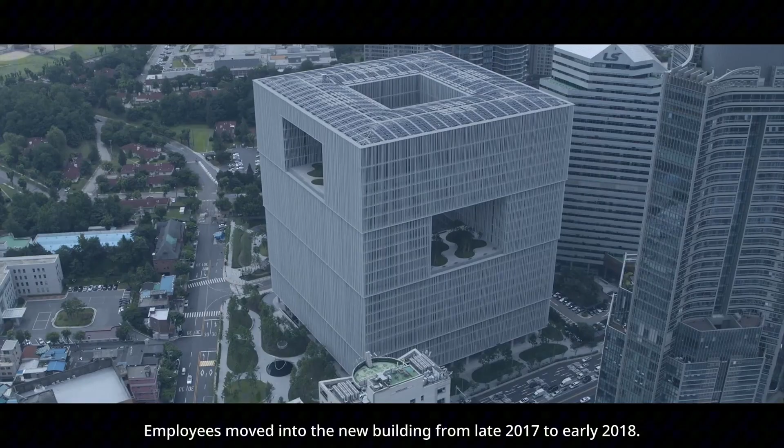After decades of growth, Amorepacific became the leading cosmetics company in Korea, with many brands and affiliates. As the company expanded, Chairman Bae aimed to make Amorepacific a global company. To support this goal, the company needed a larger and more integrated workplace, where employees and affiliates could work together more efficiently. For this reason, the old Yongsan building was redeveloped, and the new Amorepacific headquarters was completed on the same site in 2017. Employees moved into the new building from late 2017 to early 2018.

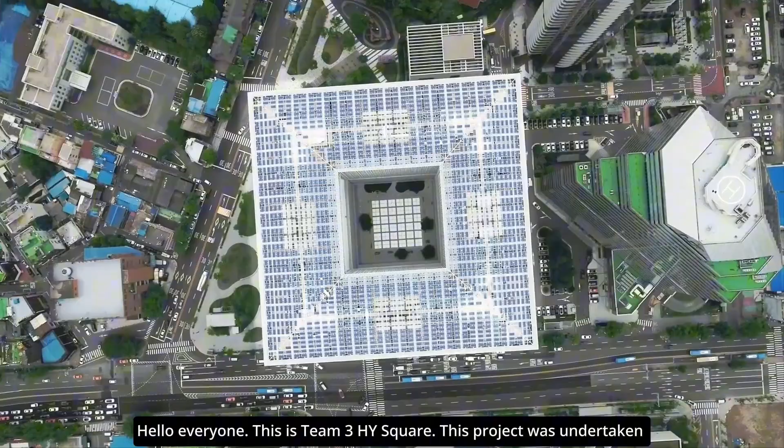This project was undertaken to construct a new office building to renew the old office building on the existing site. To achieve this goal, the client Bae commissioned the work to David Chipperfield through a competition.

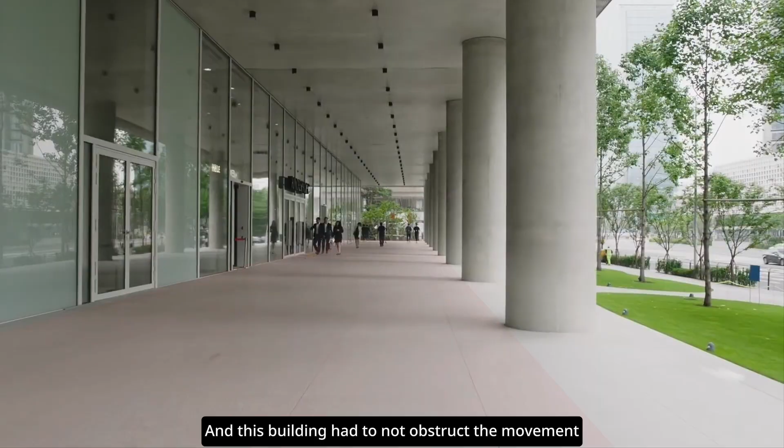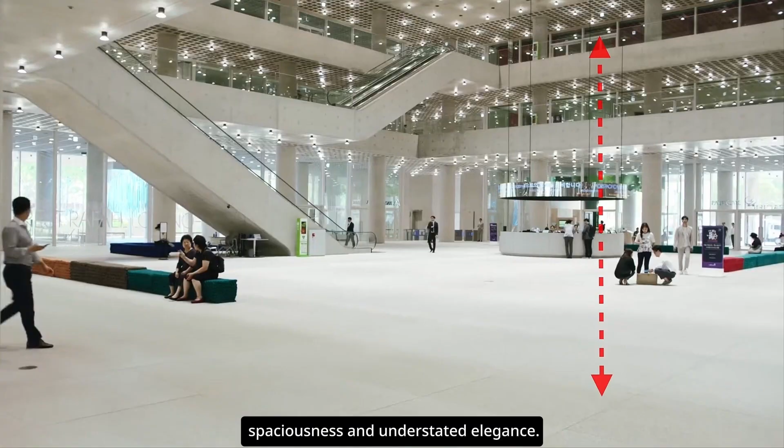Since the building is located in the center of Yongsan, the goal was to have a unique exterior that suits the character of the location. This building also had to not obstruct the movement of users at the existing site. For the inside, they considered ways to maintain a sense of spaciousness and understated elegance. Additionally, they designed a central courtyard to enhance users' work efficiency and community while fostering daily satisfaction.

For the next step, we moved on to the design concept and the architect's intention behind this unique architecture. First, one of the main design concepts of this building is the courtyard structure, inspired by the traditional Korean house, hanok. This courtyard can make a space that's open to the sky, bring natural light and ventilation, and also a place where people can gather. The concept of the traditional hanok courtyard was reinterpreted into the design of the Amorepacific building.

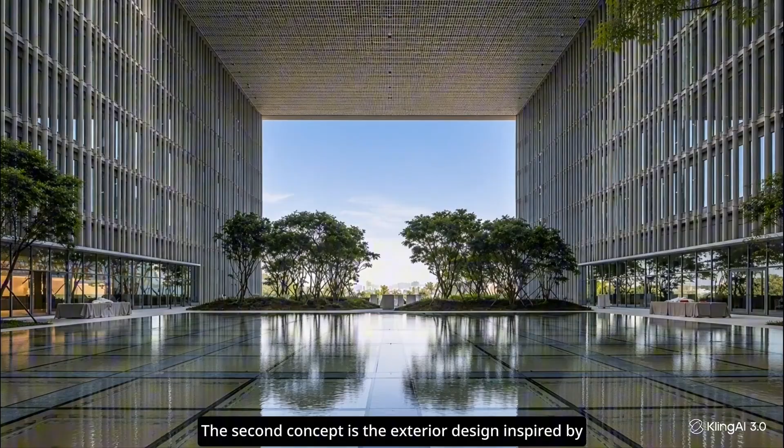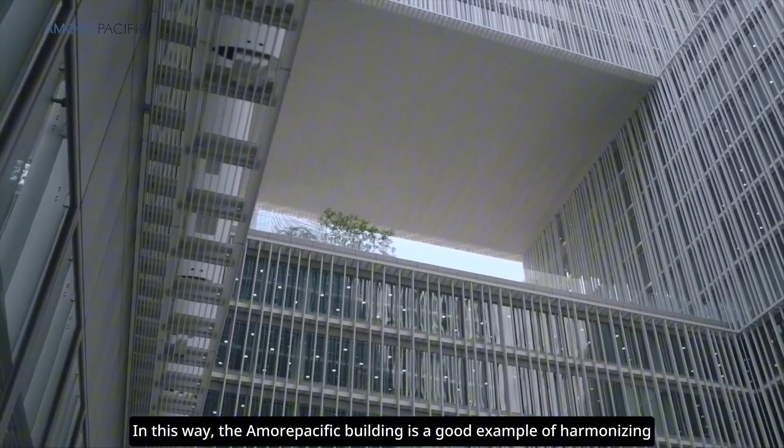The second concept is the exterior design inspired by traditional Korean white porcelain called baekja. The bright and simple facade reflects the elegant and pure beauty of white porcelain while expressing Korean identity through modern materials. In this way, the Amorepacific building is a good example of harmonizing traditional Korean elements with modern architecture.

The facade and louver design are inspired by the traditional Korean cheoma. In traditional architecture, the cheoma provides shade and protects interior spaces from excessive sunlight, while allowing natural light and air to enter. This concept is reinterpreted in the Amorepacific headquarters through a vertical louver system, which blocks direct sunlight and reduces heat gain while bringing soft, indirect daylight into the building.

How exactly did David Chipperfield's ideas get translated by the engineers?

From this point on, we will explain the key innovative construction processes and the innovative engineering methods applied on site to realize this structure.

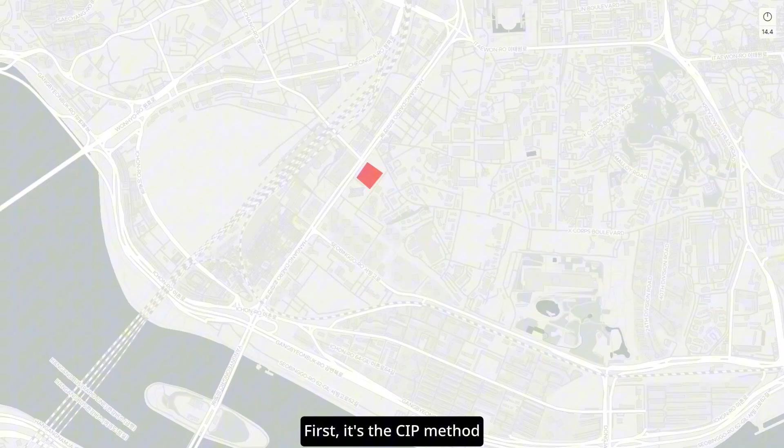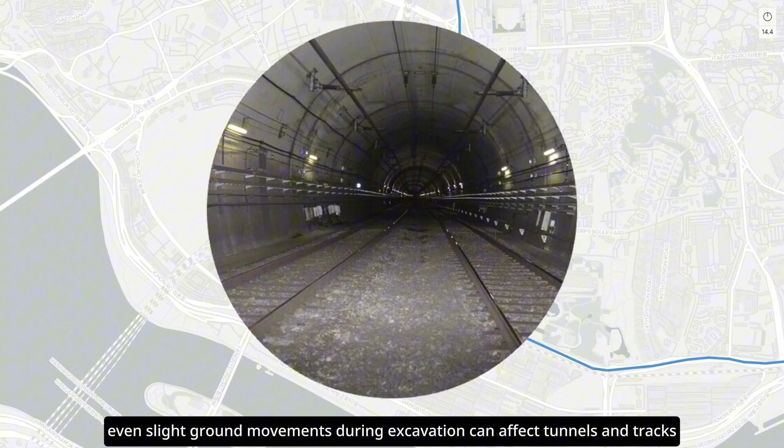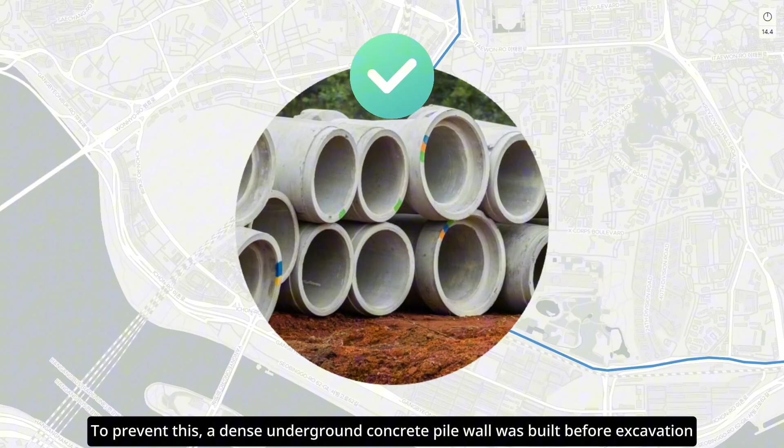First is the CIP method. Because subway line 4 runs right next to the site, even slight ground movements during excavation can affect tunnels and tracks. To prevent this, a dense underground concrete pile wall was built before excavation to control ground subsidence, vibration, and construction noise all at once.

We will now explain the construction method. To prevent the soil wall from collapsing during the excavation process of the indicated section, the CIP method is used.

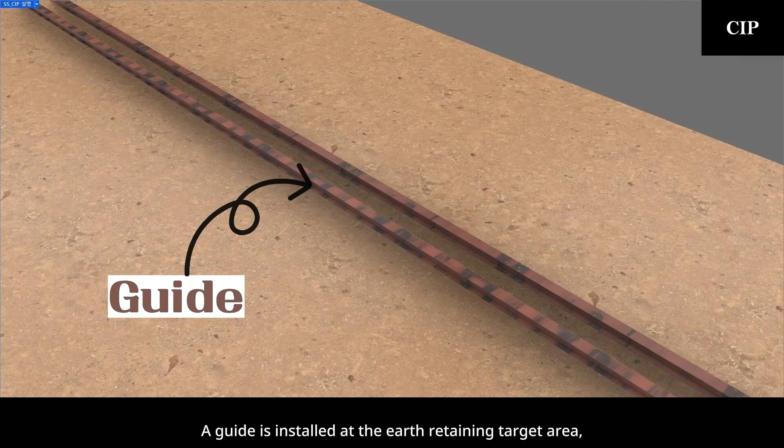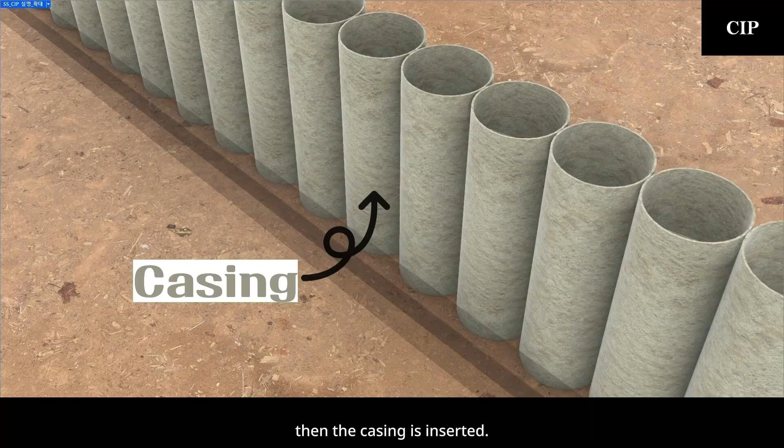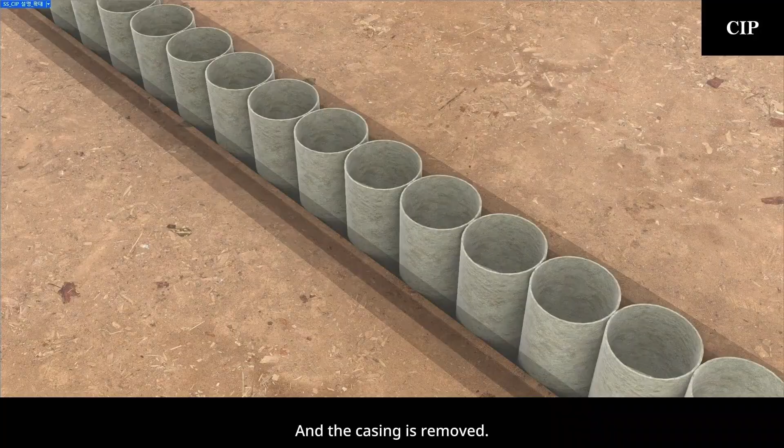A guide is installed at the earth retaining target area. Then, excavation is performed with a drill machine. Then the casing is inserted. H-beams, which will bear the lateral earth pressure, are inserted. Rebars are inserted to enhance the shear stiffness of the wall. After inserting, the concrete is poured, and the casing is removed. Finally, the upper guide beams are removed to prepare the excavation.

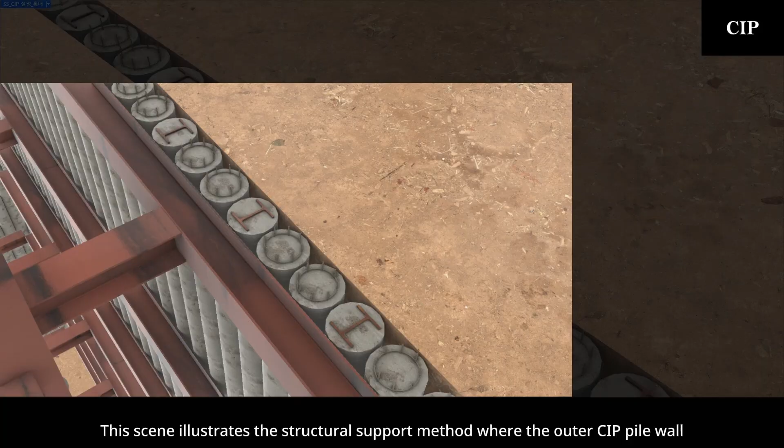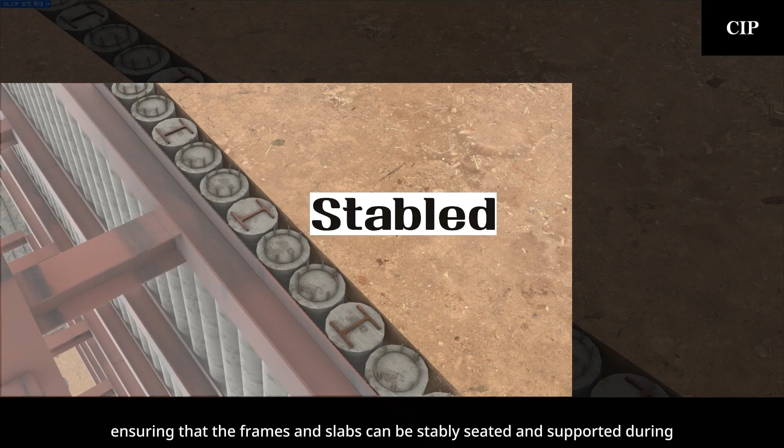This scene illustrates the structural support method where the outer CIP pile wall and the internal first floor steel frame horizontally interlock with each other. These CIP piles serve as the strongest structural foundation from the perimeter, ensuring that the frames and slabs can be stably seated and supported during the upcoming top-down process.

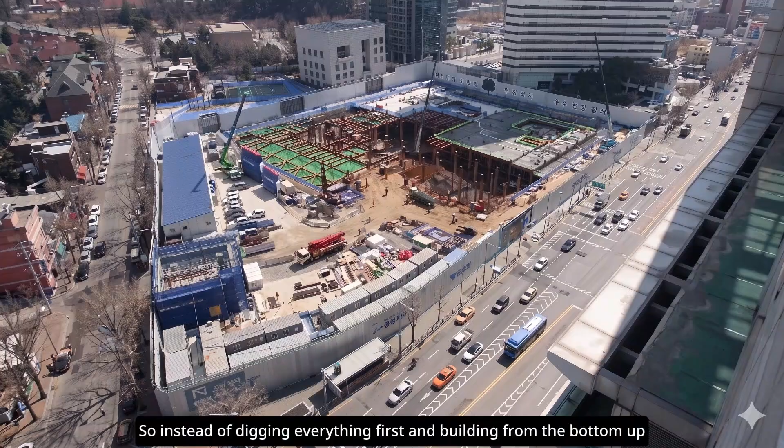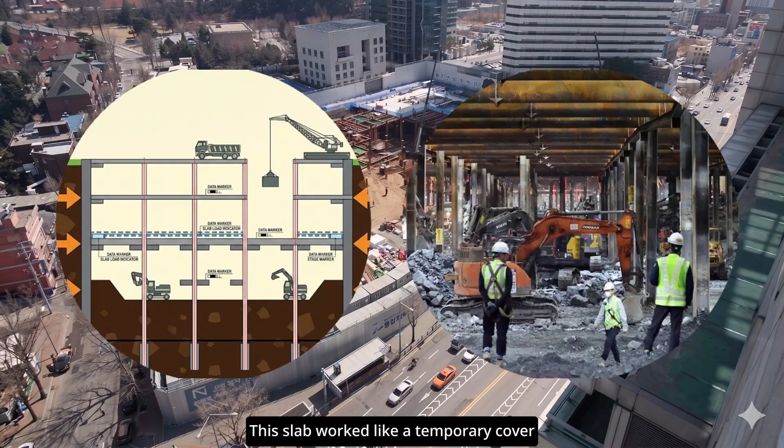Second, let's look at the top-down method. For this massive 7-basement excavation in the heart of Yongsan, the site was extremely limited, with very little room for conventional construction work. So, instead of digging everything first and building from the bottom up, the B1 floor slab was cast early in the process. This slab worked like a temporary cover, helping to trap noise and dust inside the site and reduce impact on the surrounding city.

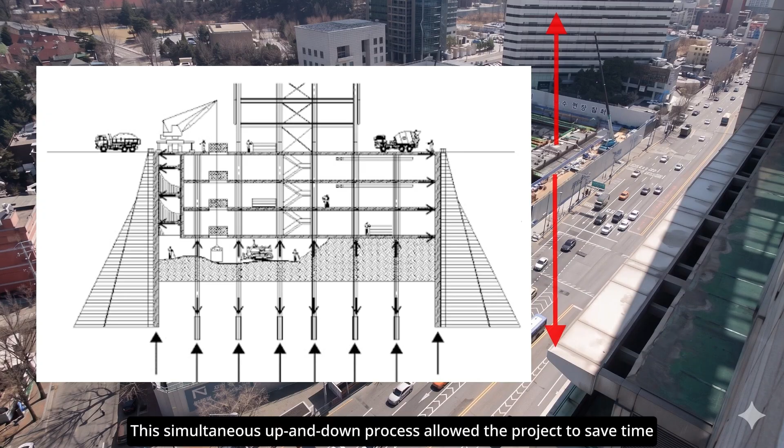At the same time, construction continued in both directions. Excavation moved downward while the upper structure was built upward. This simultaneous up and down process allowed the project to save time, improve site efficiency, and overcome the tight urban constraints of the Yongsan location.

Let's move on to the next construction method.

First, holes are bored into the soil ground using a drilling rig. Steel columns are deeply installed to support loads. This is the internal view of the columns.

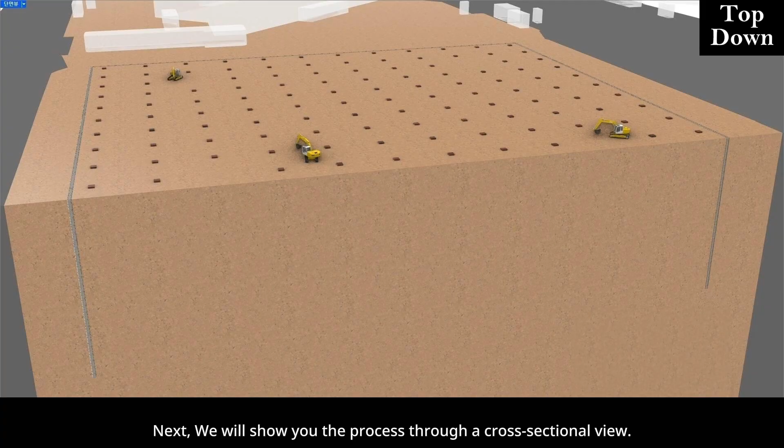Next, we will show you the process through a cross-sectional view. Initial excavation is carried out to secure space for pouring the first floor slab. The foundation framework is laid down.

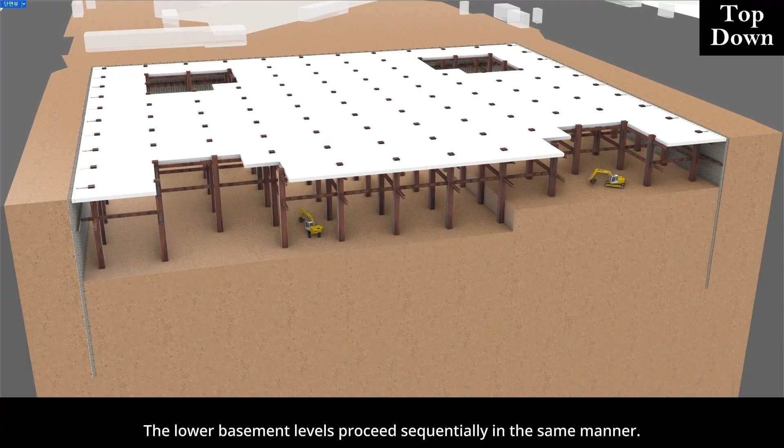Afterward, the downward excavation process continues. Following the excavation, the first floor slab is poured over the assembled beams. The lower basement levels proceed sequentially in the same manner.

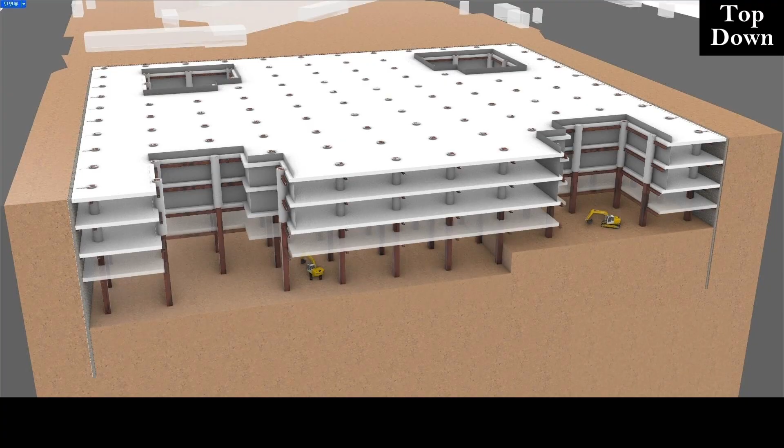Upon excavating down to the third basement level, the concrete core structure begins building upward for the superstructure framing. Then excavation resumes downward. From this stage, the actual top-down method unfolds, with core lifting above and downward excavation below.

With the basement pouring completed, construction proceeds to the superstructure.

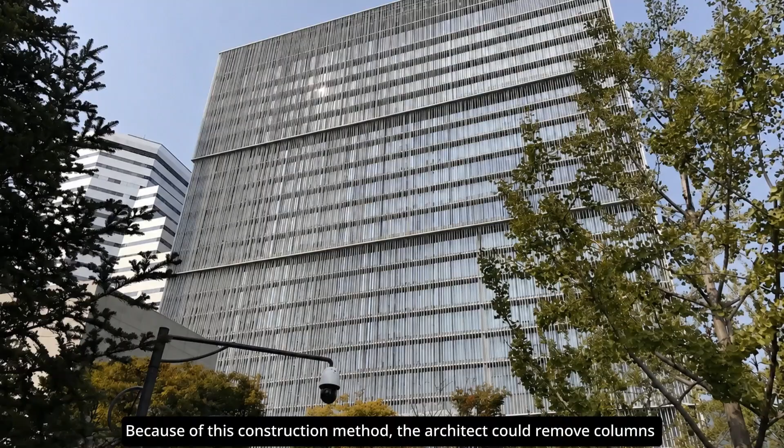Third is the megatruss method. To maximize openness in the community area, plan a massive void and boldly eliminate internal columns. Instead, a megatruss was installed to safely distribute the heavy upper load to the building's cores. Because of this construction method, the architect could remove columns from the void space and create a more open community area. As a result, users can experience a wider, brighter, and more spacious environment inside the building.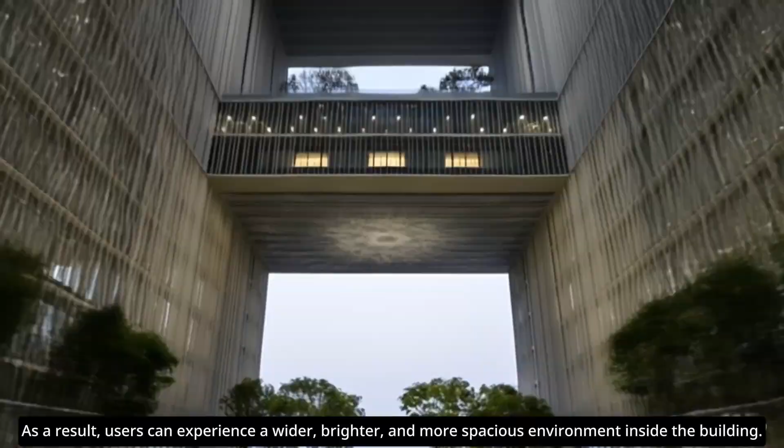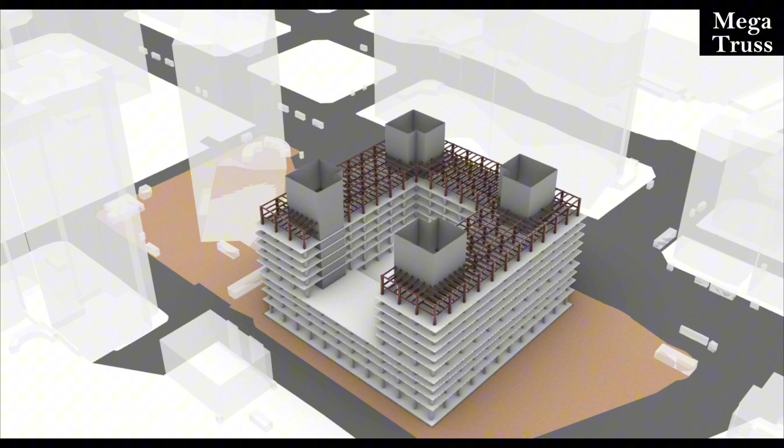Now we will show the construction process of the ground level structure. Cores and columns rise one floor at a time. Next is the bracing. Supported by the core, diagonal bracings are installed to support the void spaces. Here is the result. Moving on, columns and beams go up with the core.

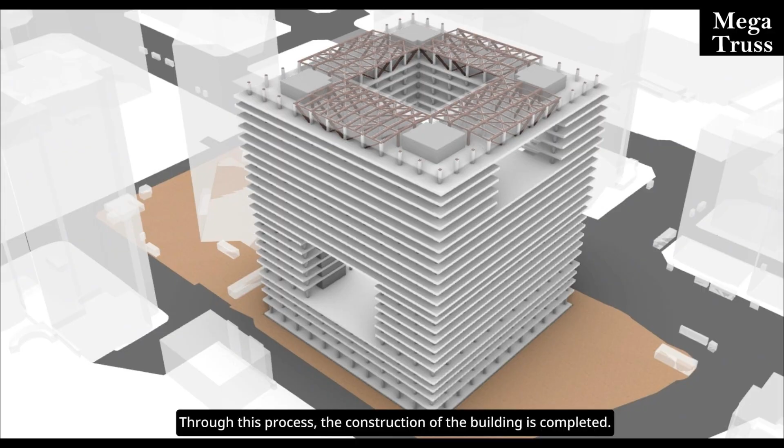At the top level, the megatruss is installed. Then the plates are placed. The slabs are constructed sequentially from the upper floors to the lower floors. Through this process, the construction of the building is completed.

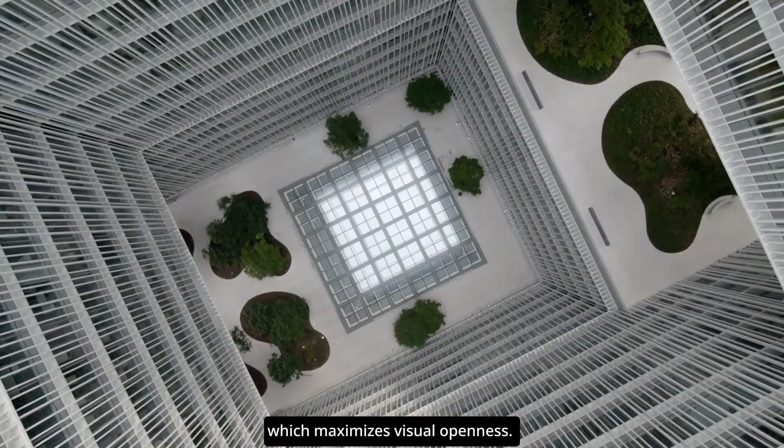The Amorepacific building is highly characterized by its massive central void, which maximized visual openness. This open structure not only boasts stunning aesthetics, but also serves as a vibrant community space where employees can gather and interact. Architecturally, it looks absolutely flawless.

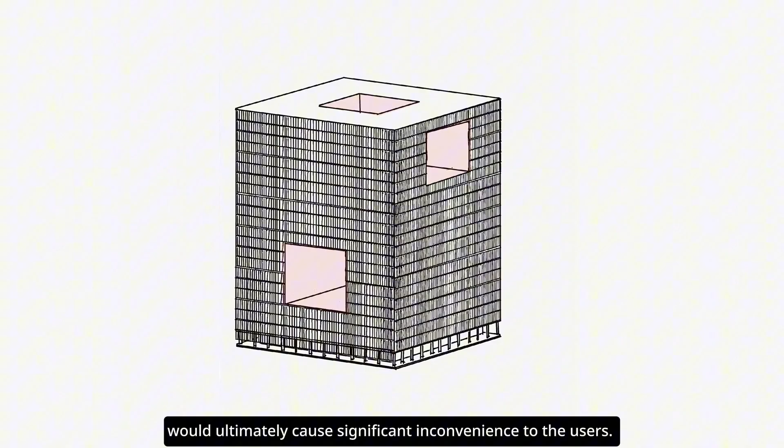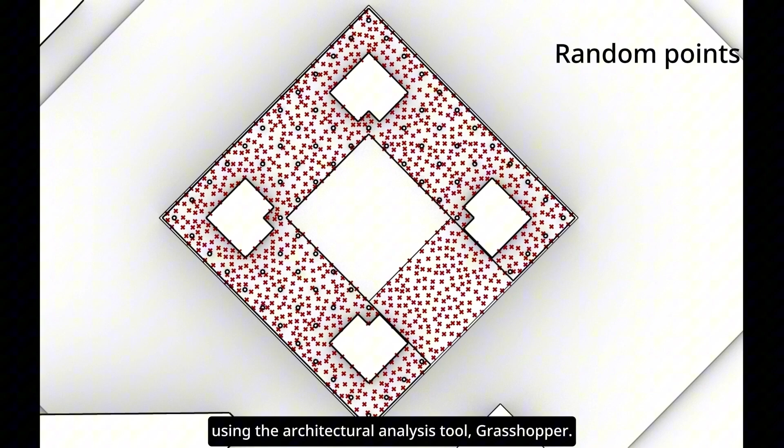But is it really without flaws? While this structure is excellent for making community, we saw that the broken circulation would ultimately cause significant inconvenience to the users. We precisely simulated the internal circulation traffic using the architectural analysis tool Grasshopper.

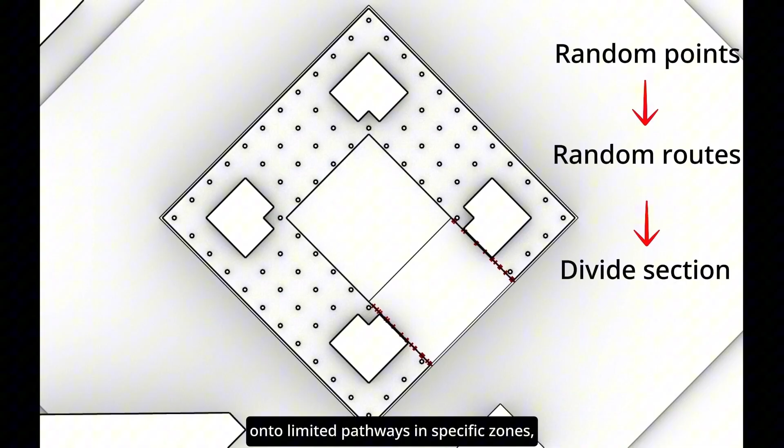The results confirmed our hypothesis. The pedestrian traffic heavily converged onto limited pathways in specific zones. It caused severe bottlenecks, essentially a form of internal traffic congestion.

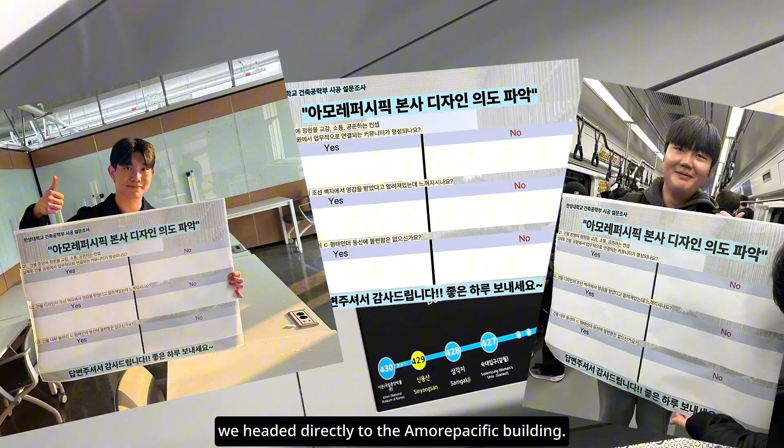Since computer simulation data wasn't enough to be entirely certain, we headed directly to the Amorepacific building. We conducted a user survey targeting the actual employees who navigate this space every single day, both inside and outside the building.

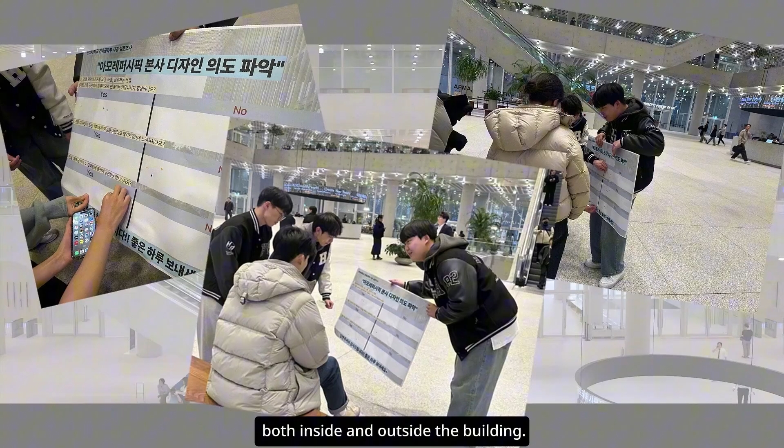Did their thoughts match our analysis? Based on the sticker votes, we verified the results based on the survey results provided directly by people.

First, regarding community formation through the central garden, 79% of users responded positively, confirming that the communication space is well activated as intended.

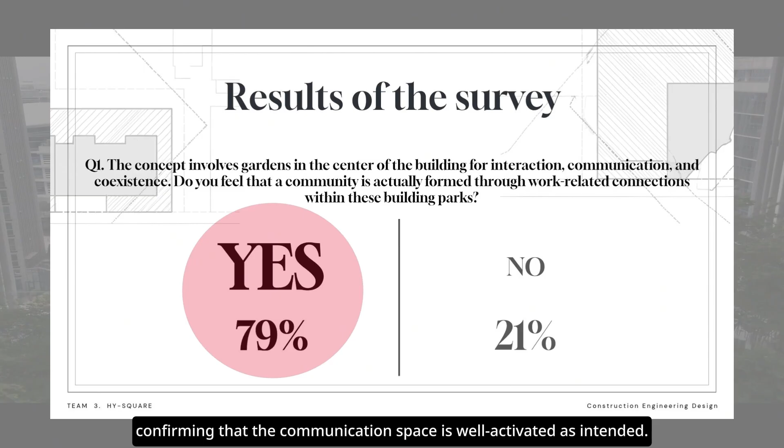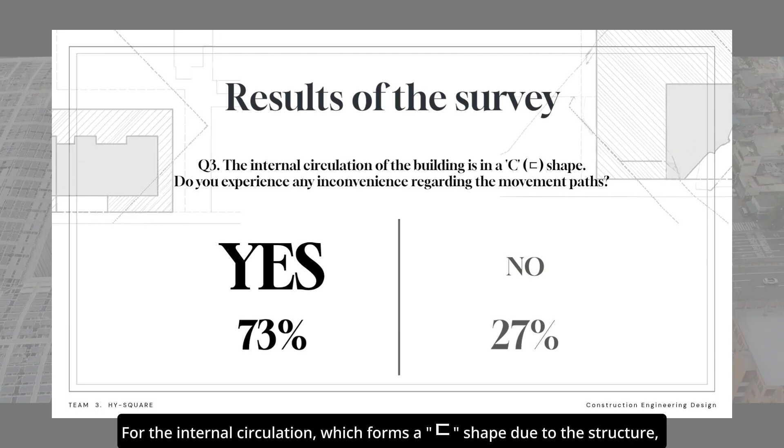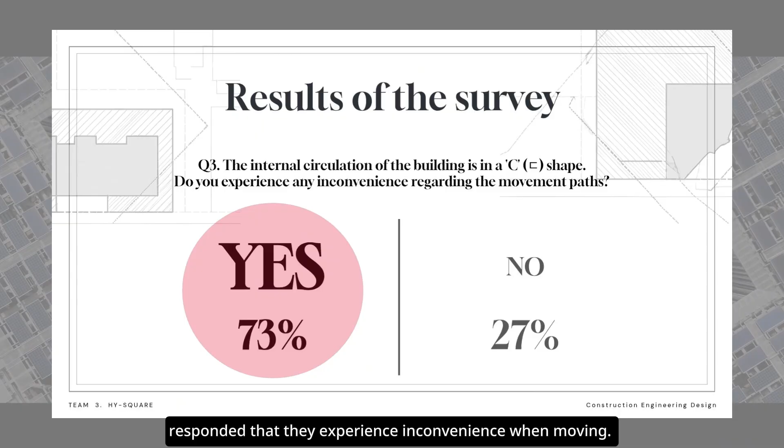For the internal circulation, which forms a ㄷ shape due to the structure, a staggering 73% of actual users responded that they experience inconvenience when moving. This quantitatively proves that the architectural structure chosen for aesthetics and communication has become an inconvenient obstacle that users must overcome every single day.

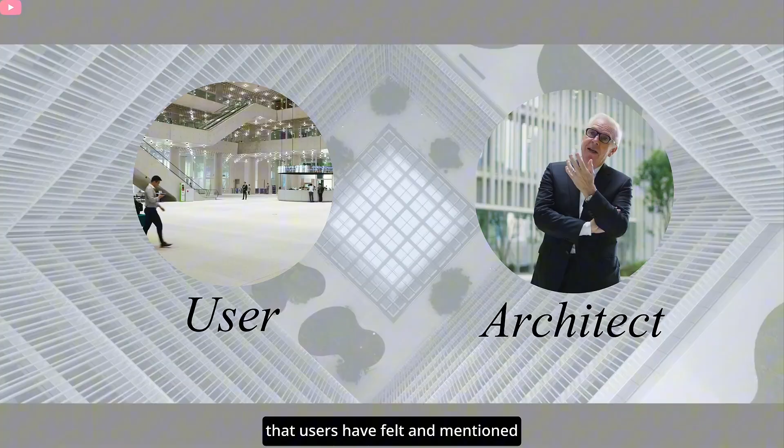We began to think about ways to resolve these inconveniences. We considered ways to address the inconveniences that users have felt and mentioned, as well as ways to preserve the feeling of courtyard that the original architect wanted.

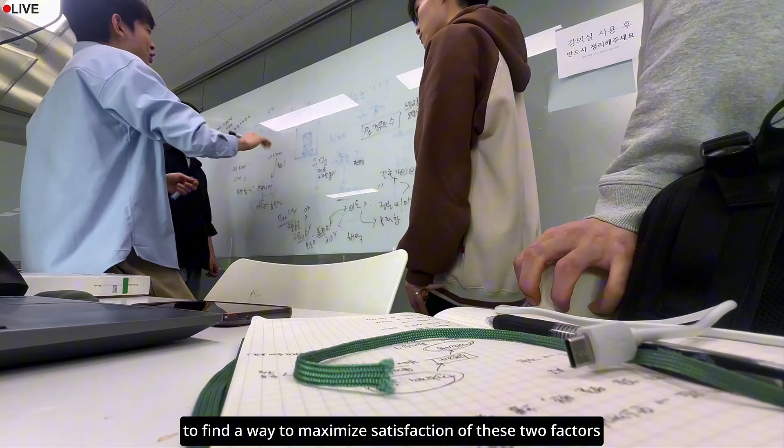We conducted a mass study to find a way to maximize satisfaction of these two factors. In the process of mass study, many kinds of alternatives were presented. We thought about what should be prioritized in order to refine these rough ideas.

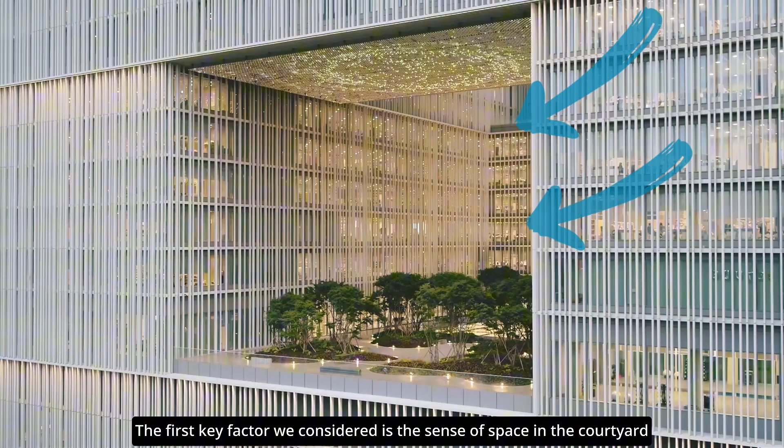The first key factor we considered is the sense of space in the courtyard. Reflecting this, three alternatives that do not undermine the existing sense of empathy were selected.

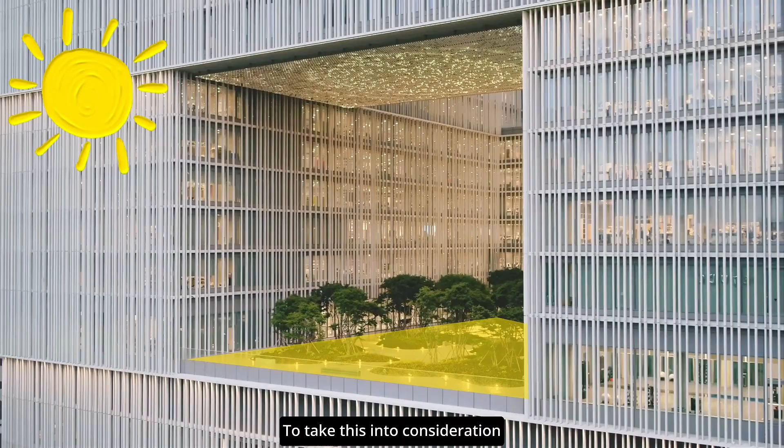The second key factor we considered is the environmental element caused by the courtyard. To take this into consideration, we directly used Rhino and Grasshopper to conduct environmental analysis and optimization.

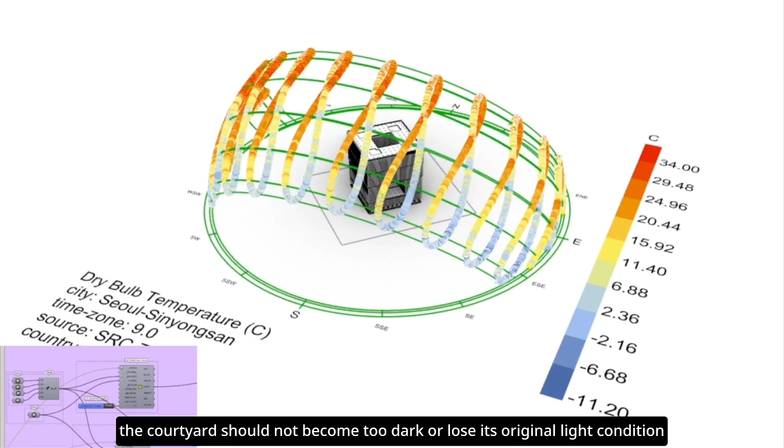First, we analyzed how each option affects daylight in the central courtyard. Even if a bridge is added, the courtyard should not become too dark or lose its original light condition. To check this, we divided the courtyard floor into grids and compared how long direct sunlight reaches each grid.

Second, we conducted an indoor daylight simulation. We checked whether each option makes the interior darker or reduces the quality of the light environment.

We compared how deeply daylight enters the inside and how much comfortable illuminance is secured. Here, a higher UDI value was considered better because it means the indoor space remains comfortable for a longer time.

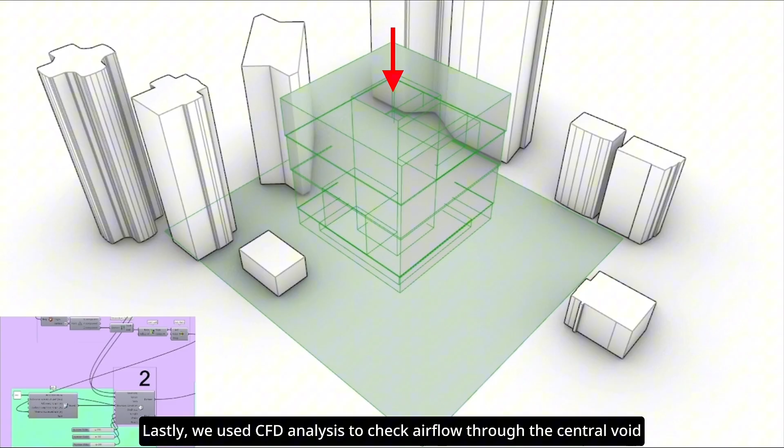Lastly, we used CFD analysis to check airflow through the central void. Since the void also supports ventilation and openness, an option that blocks airflow too much is not suitable.

So CFD was used as a pass or fail criterion, not as a numerical score. Options that significantly blocked airflow were excluded.

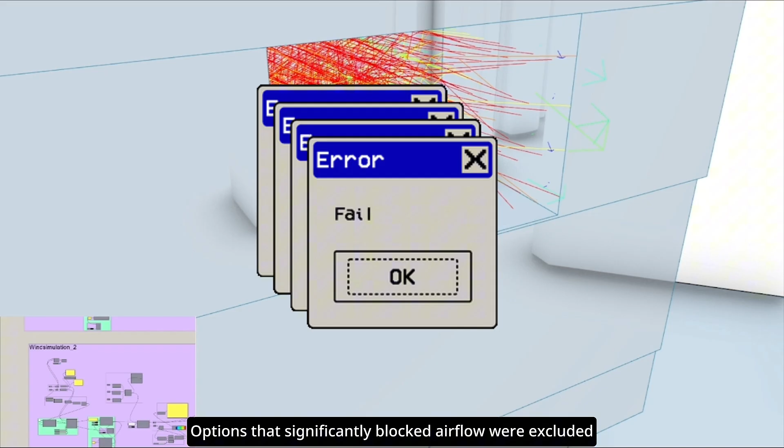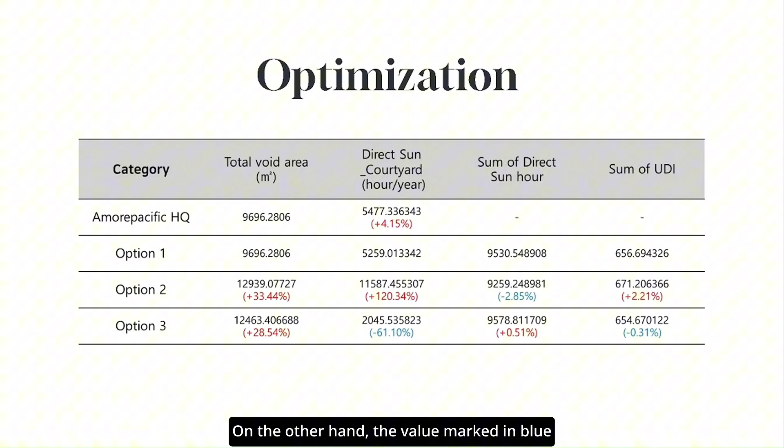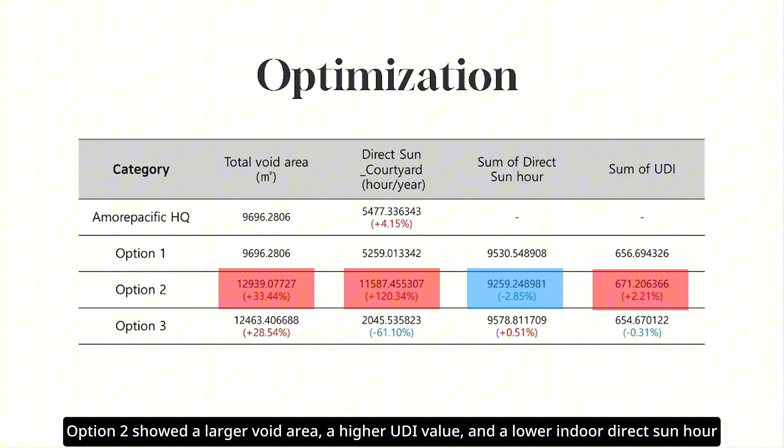On the other hand, the value marked in blue, indoor direct sun hour, was considered better when it was lower. Based on this criteria, option 2 showed a larger void area, a higher UDI value, and a lower indoor direct sun hour. For this reason, we selected option 2 as the best option.

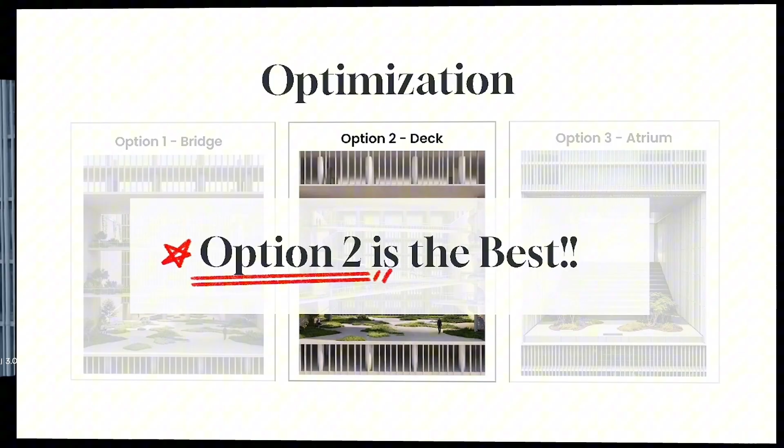So, one question comes up. If this bridge had been planned from the beginning, how would it be constructed?

The answer is the lift-up solution. In this method, the bridge is first fabricated on the ground or at a lower level rather than assembled piece by piece in the air.

Then, temporary supports and hydraulic jacks lift the bridge slowly and evenly to its final position. Once it reaches the target height, it is connected to the main structure, such as the beams, columns, or megatruss system.

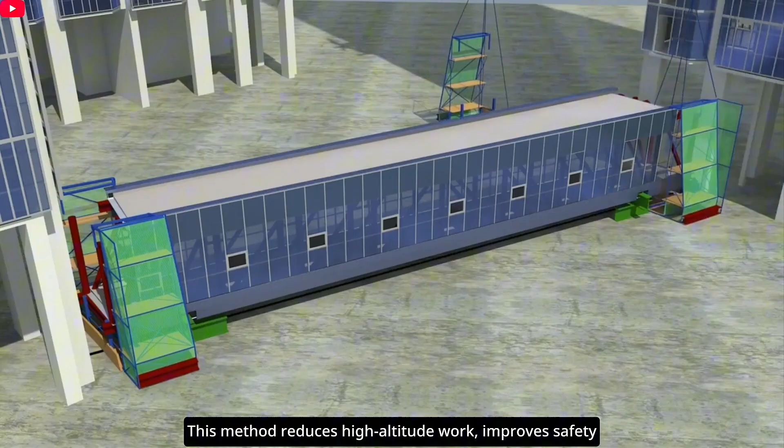This method reduces high altitude work, improves safety, and makes the construction process more controlled. Therefore, it can be a realistic method for installing a bridge inside the central void.

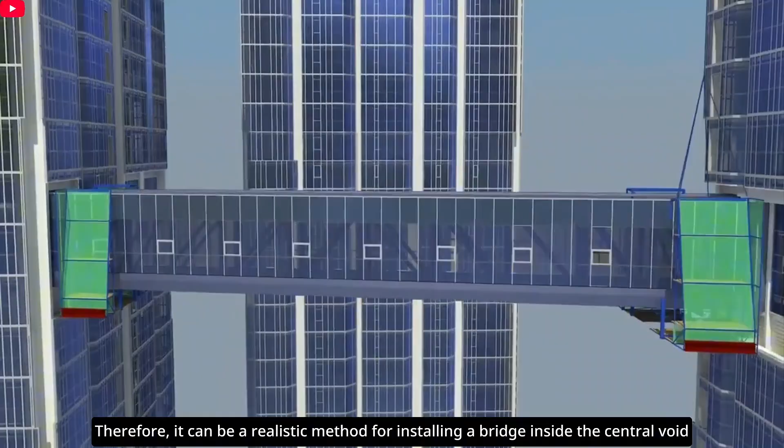Adding a bridge could shorten circulation routes and improve the overall usability of the space. Also, it is not technically impossible to build.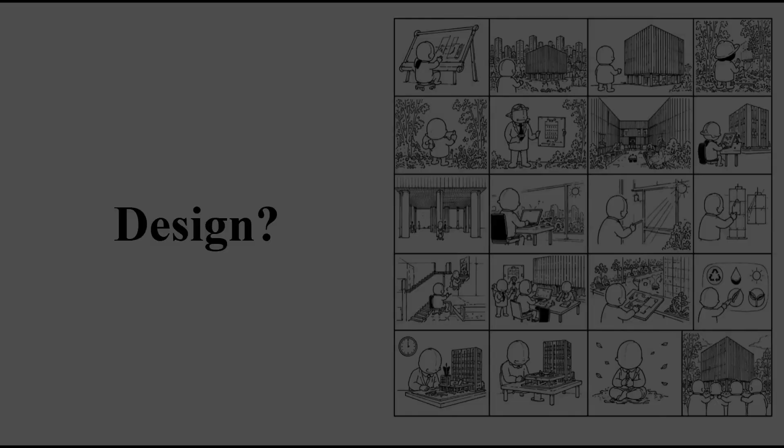However, in actual buildings, this kind of solution is not always applied. Then, what kind of relationship should have been considered? Design—designers consider the building's concept and design intent.

Client—the client considers construction costs and maintenance issues. Users—users consider circulation routes and convenience.

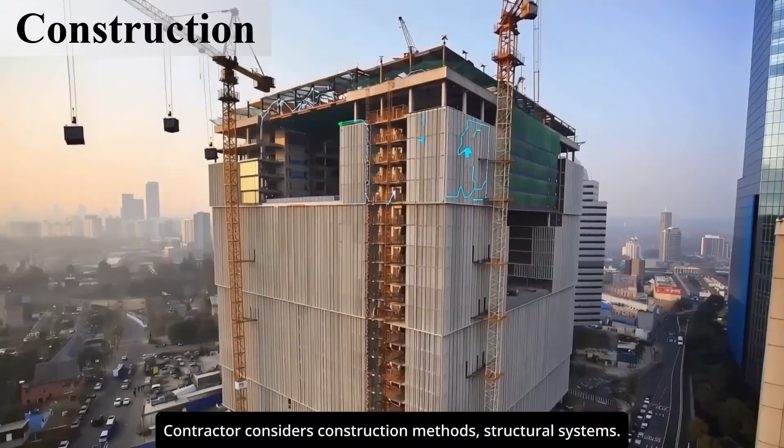Construction—the contractor considers construction methods and structural systems. In traditional processes, each group usually works separately. Then, is there a more efficient way to consider these factors together?

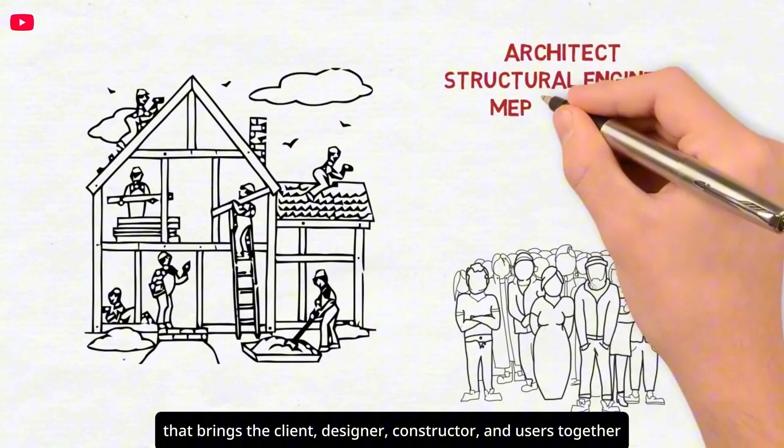First, IPD is a project delivery method that brings the client, designer, constructor, and users together from the early stage. IPD makes a collective mindset easier to achieve.

These perspectives overlap and influence each other. IPD helps integrate them early, allowing the project team to make more balanced and efficient decisions.

As a second alternative, we propose PM, or Project Management. PM is a method of coordinating the needs of multiple stakeholders and managing projects within the existing construction process.

It collects the needs of all stakeholders and organizes them on the basis of cost, schedule, quality, risk, and user convenience to make decisions.

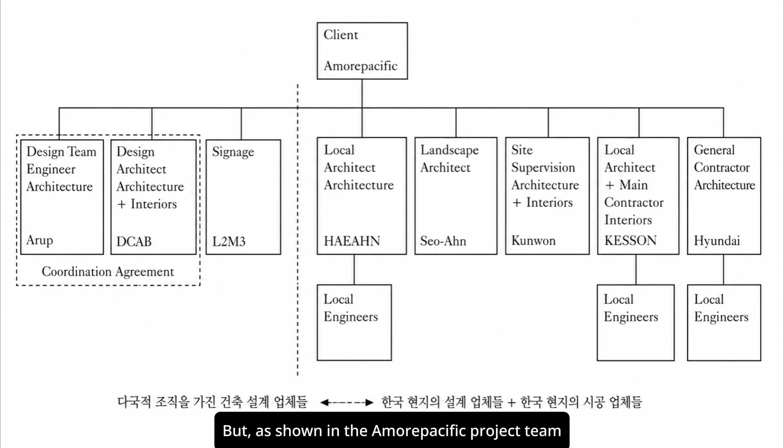But as shown in the Amorepacific project team structure in Korea, it is difficult to apply these methods in practice. Each team has its own responsibility and contract relationship.

Because of this, it is difficult for all stakeholders to work as one integrated team from the early stage.

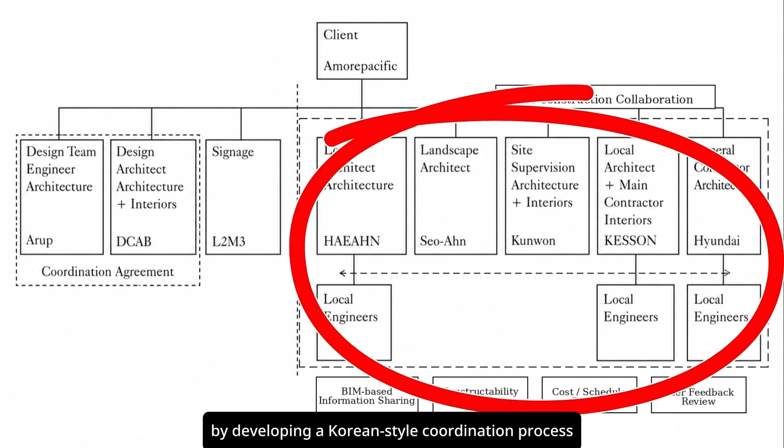Korea may also need a system similar to IPD and PM by developing a Korean-style coordination process that considers cost, schedule, constructability, maintenance, and user experience together from the early stages.

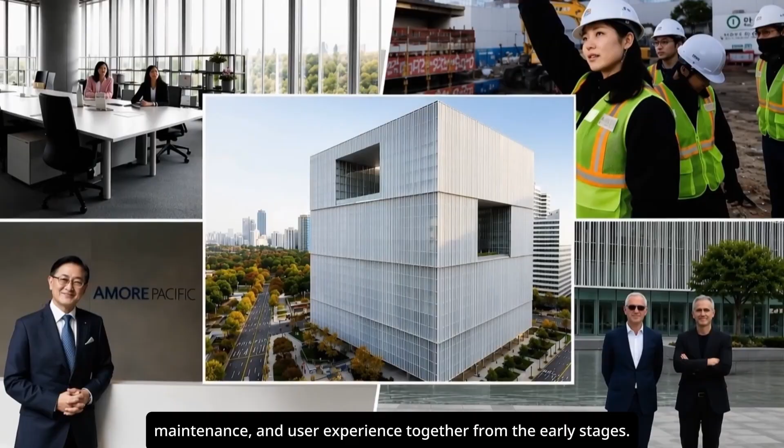The design idea was based on Korean identity. The courtyard was inspired by the hanok, and the facade and louvers were inspired by the image of a moon jar. However, these design ideas also made construction difficult.

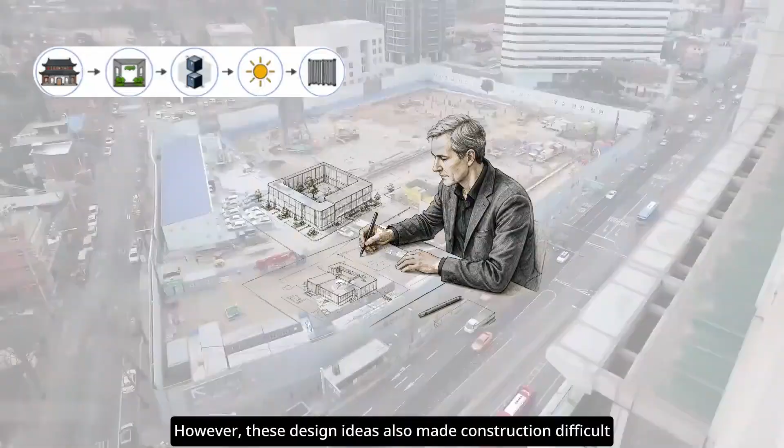The site was close to subway line 4, and the large voids required careful construction planning. For this reason, special construction methods were used.

CIP and top-down construction helped make the work more efficient on the limited site. The megatruss and hanging floor systems also made the large open void possible.

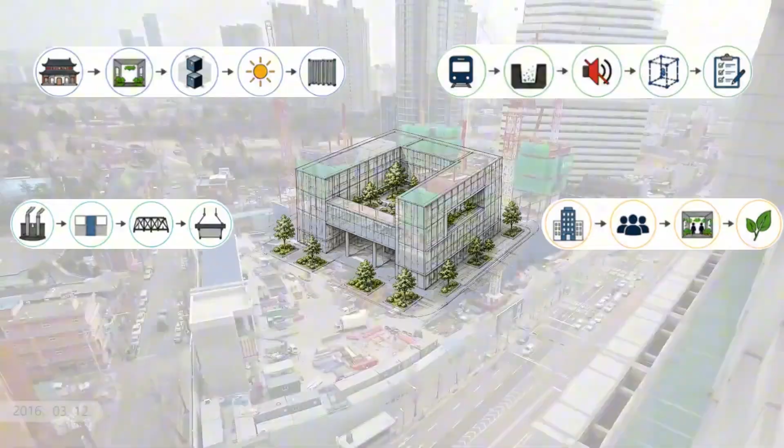After completion, the building successfully created an open community space. However, during actual use, we found a circulation problem.

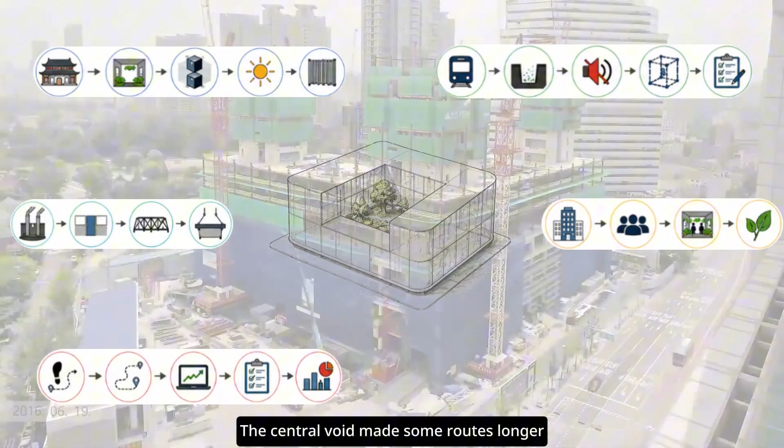The central void made some routes longer, so we tracked this issue through Grasshopper simulation and user surveys. To solve this problem, we proposed a bridge alternative.

We also checked courtyard daylight, indoor daylight, and airflow. Based on this process, we selected the most balanced option.

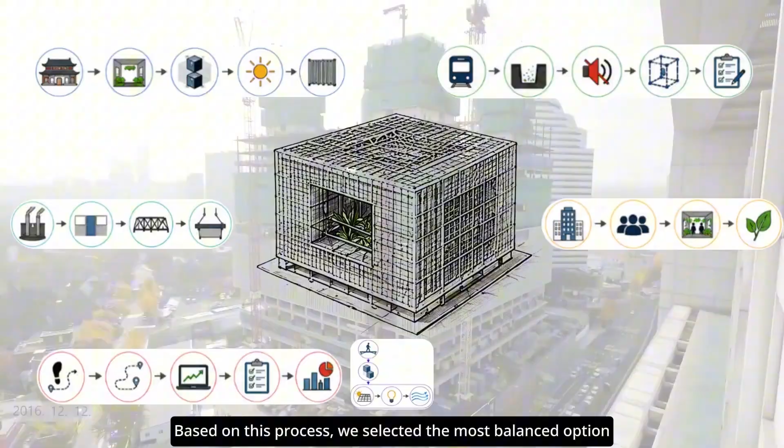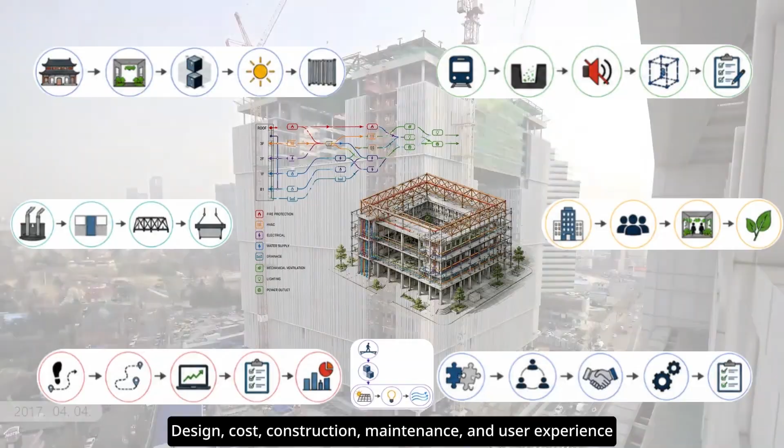Finally, this project taught us that architecture should not be judged from only one point of view. Design, cost, construction, maintenance, and user experience should be considered together.

Through integrated thinking such as IPD or PM. Thank you for listening.